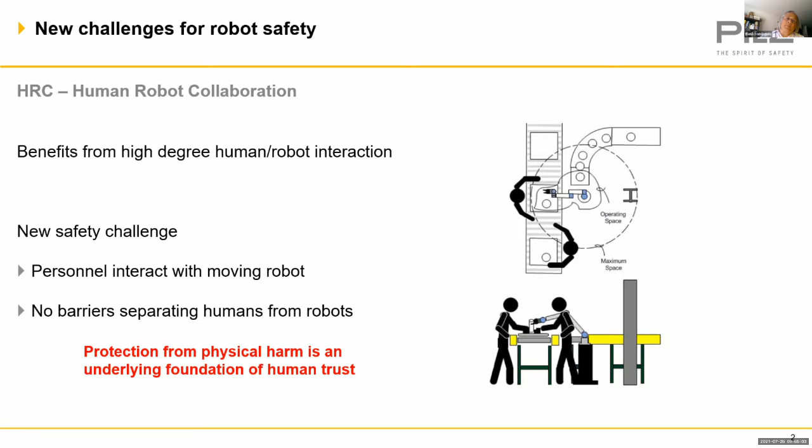However, that brings new challenges because now people are interacting with a moving robot and there are no barriers separating them. One thing I've been listening to here is talk about physical harm, the protection from physical harm, and I see that as an underlying foundation for human trust. If you think that robot's going to hurt you, you're not about to trust that robot. So this is the starting point, and the people here are taking it on to the next level.

Now, to safeguard a robot, you have to look at it in a more in-depth engineering view. In the past, you just had to put a fence around it, put in an interlock door, and stop all motion when you approach the robot. However, now we have a moving robot, so in this application we have to try to predict contact events. When and where might a robot strike someone? We have biomechanical limits that we want to respect to avoid injury.

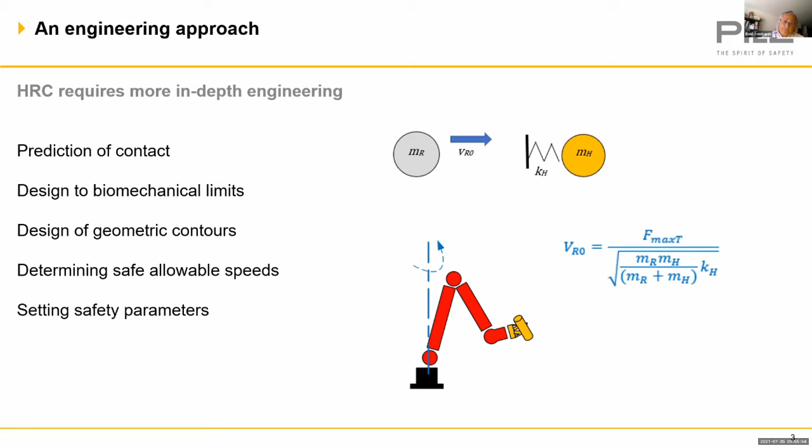We're looking at the designs of tools and fixtures and parts now, and the geometric contours they have to avoid injuries. We're looking at safe speeds and the calculations and predictions of that, and setting a multitude of new safety parameters. That comes about because of the collaborative robots that are now defined in the ISO 10218. Well, I shouldn't say now, it's been 10 years.

There are 4 methods currently identified: safety monitored stop, where someone approaches the robot and it comes to a stop, yet it's still powered up and ready to move at a moment's notice. Method 2, hand guiding, as you saw - you grab the robot tool or the part and apply force, or you hold the control and move the robot. But once you release the control, the robot will stop.

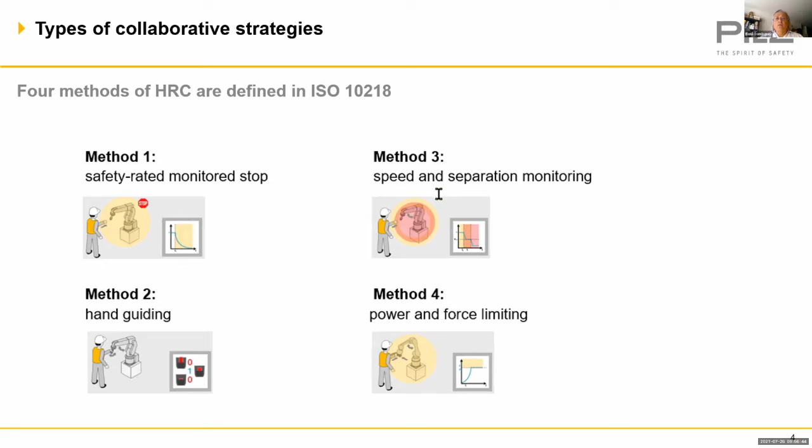Method 3, speed and separation monitoring, which is the hardest application, but there are some applications such as Veo Robotics that are looking at making this reachable in industry outside of the lab. And then method 4 - this is the application that industry in general is looking at, where they're focused on using these types of robots at this point.

They're smaller robots set up with small motors or control systems that will control the forces, the speeds, and the reach of the robot to keep the operation safe.

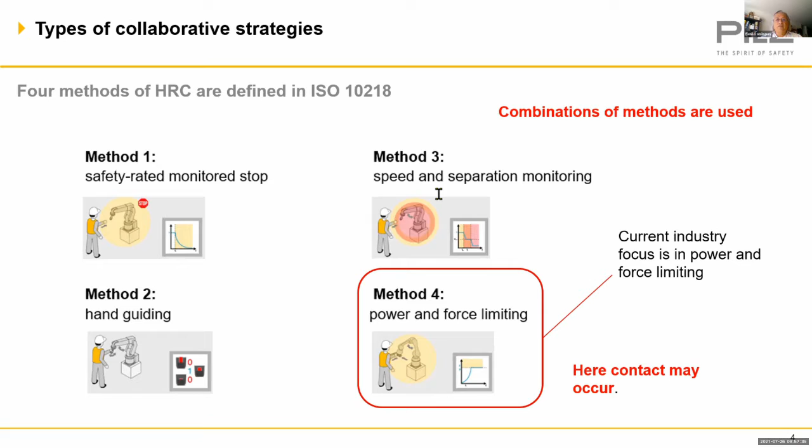The big difference here with method 4 is that contact may occur. Now you have people actually interfacing with the robot while it's moving, whereas in the other 3 methods the robot had stopped. In addition, typically there'll be a combination of these methods, whether you control the speed and slow it down, adjust the force, or bring the robot to a stop.

Now, in doing this, the essential thing that's mandatory in the robot safety standards of today is that you perform the risk assessment. This is the ISO 12100 model, where you look at risk as a function of the potential severity of harm, and the probability of occurrence of that harm.

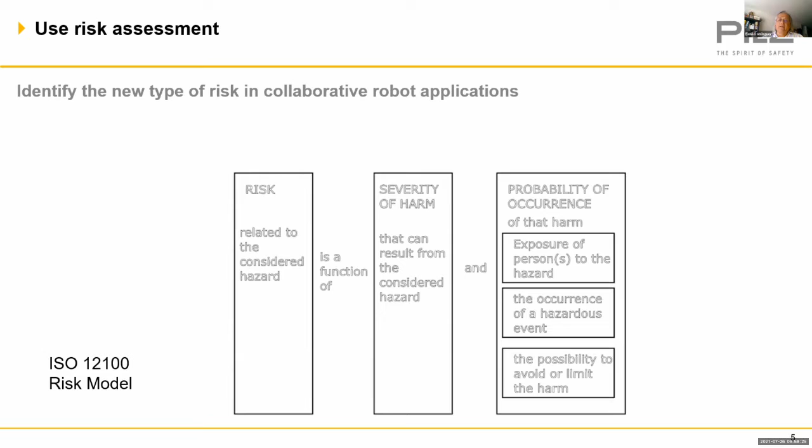Since probability of occurrence is hard to predict on paper without any history, we look at 3 factors: the exposure of the person to the hazard, the occurrence of a hazardous event - something fails, somebody does something they shouldn't do - and thirdly, the possibility of avoiding that harm. So you take that concept and apply it to the risk assessment of a collaborative system.

One of the essential new things here is that we have to realize there will be contact events - crush events and impact events. Situations where the robot presses the operator against a fixed object, and situations where the robot passing through a path in free space will contact that person at a given speed and momentum. So these contacts will occur.

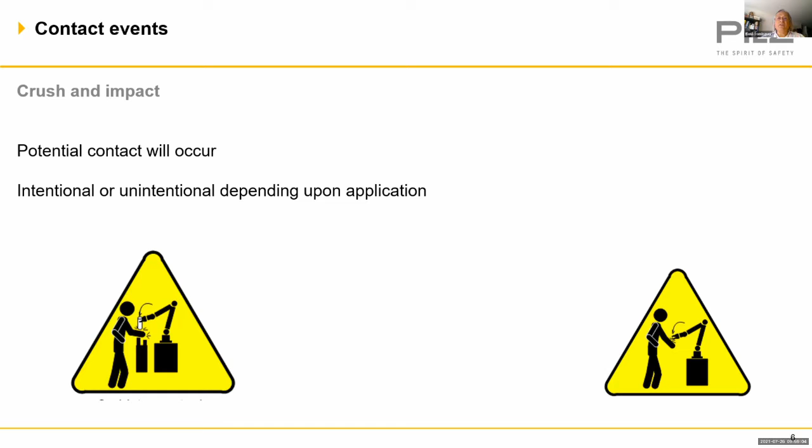Human nature is people will get in the way, either intentionally or unintentionally, depending on the application. So that just complicates the requirements for safeguarding the robot.

Now, the good thing is we have some data to work with. As an engineer, I love data, I love information, I love guidelines. So what we have in the ISO TS 15066 document is...

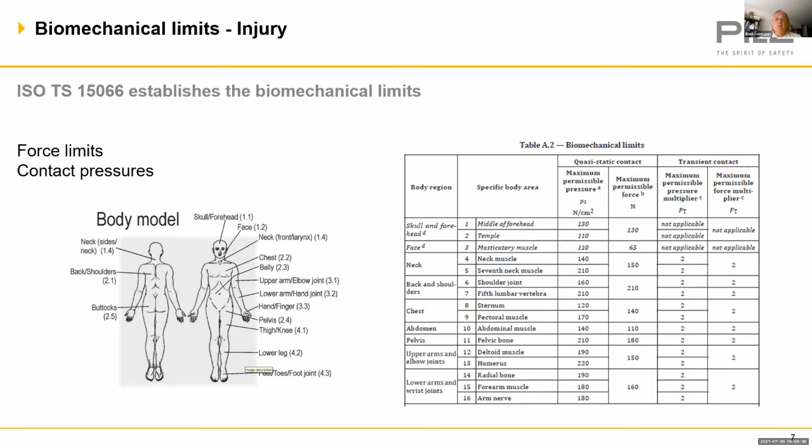...it establishes some initial biomechanical limits, that is, limits related to the human body and what it can take, that define force limits and contact pressure limits along different body regions. So with that, we have a chart.

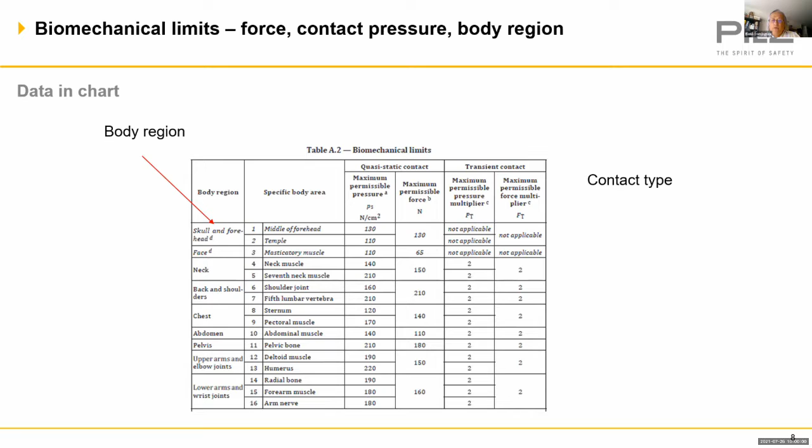This is only half the chart, by the way, so it's missing a few pieces of body regions that are common. But the first thing you notice is it says, if it strikes me in the chest, if it strikes me in the head, these are the associated limits. It breaks up this table by the contact type. As I said, there were 2 types.

First of all, there's the crushing, in which case it's labeled as quasi-static here, meaning that if the robot presses against a person for a sustained period of over half a second, then these initial limits apply.

If the contact is quick - say the robot strikes you in free space and you fall away, or if the robot presses you against a fixed object but then retracts right away, so you have an impact of half a second or less - then that is referred to as the transient biomechanical limit. In which case, for each of these categories, you have two parameters that we look at.

One is permissible force. Permissible force is based on injury data from medical literature - how hard can the robot push against someone without exceeding the minor injury threshold, to the point where simple first aid, whether it's a simple Band-Aid or just some time, will allow the person to recover without any lost time. In addition, there's contact pressure.

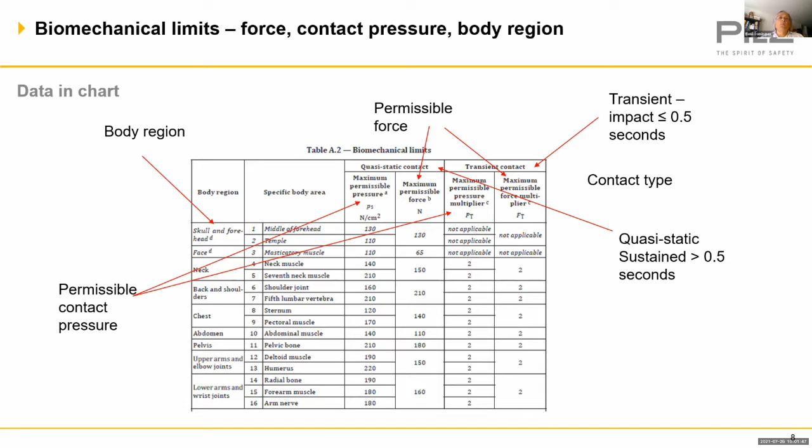Besides the force being applied, how big an area is that force applied on the human body? So we know if we take a dull surface and push it against the human body within the forces allowed in the previous columns, you're fine. But if you sharpen that edge and push it against a person within the allowable forces, now you start to cut the person. So contact pressure must go hand in hand with forces as we design a system.

So these limits, specifically quasi-static force and pressure limits, are sustained for over half a second. And the transients are for forces and pressures sustained for less than half a second. The forces are based on a minor injury threshold, while the contact pressure instead is based on a threshold of pain. The reason being that with contact pressure, you're going to feel pain first - it is the leading indicator as to where you are in the level of contact pressure.

So this table is established as a design guide for how to design the tool, so that if you can stay at or below the threshold of pain, you will definitely be below the minor injury threshold.

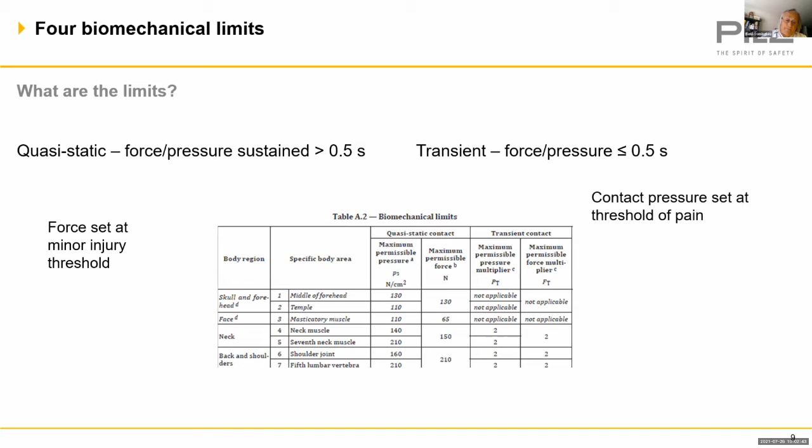So now we have data to design our systems. However, in our risk assessment, we have to define the potential contact events, regardless of what application you have with a robot. Now with the interactions of a collaborative robot, there's going to be contact. So where is it going to be?

In this case, I identified 3 different situations where I see potential contact. In an application like this, we have a robot that's picking up parts and building a pallet. In a typical job, I'll find anywhere from 5 to 20 types of potential contact points. Here I just show 3. At each one, you have to decide, is it going to be a crush or an impact? Because remember, the duration of that force or contact pressure is going to require the selection of a different biomechanical limit.

Therefore, you have to identify what type of contact it is. You also have to define the body region, because the body will vary in terms of vulnerability. Someone's hands will typically take more force than, say, my forehead, because I'm used to dealing with my hands and receiving a hit here and there as I do my work, but I'm not used to banging my head against the wall.

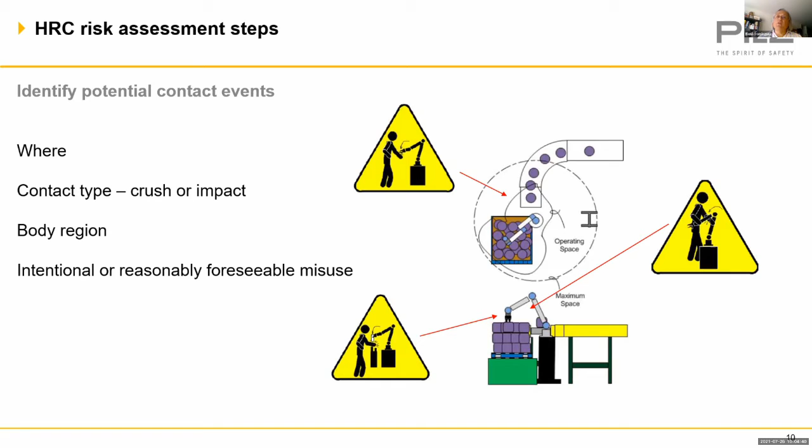But in addition, you have intentional, or as I say here, reasonably foreseeable misuse. In this risk assessment, you're going to need to ask the question, what is the human doing? If I tell them not to go in a certain area because of an increase of contact, will they do it? Most of the time, maybe 9 out of 10 times, but every now and then somebody may do something because you've identified a motivation for them to break the rules. So that goes into the assessment.

Now, the goal of the assessment is for this collaborative application to be safe. So we identify the protective measures to lower the risk, the initial risk of the cell, down to something acceptable. And running at an acceptable level of risk should give us a good safety record.

The typical thing that's done in industry now is they'll use a proven risk methodology to guide the user as to what protective measures are necessary and how many. At the end of the day, once you have experience running a cell, a good safety record is going to confirm that you've reached that level of safety.

In this case, I just show a graph out of the ANSI RIA TR R15.306 robot risk assessment methodology, where it shows a graph where you estimate the risk, and it shows some guidance in terms of what protective measures should be applied based on the initial level of risk.

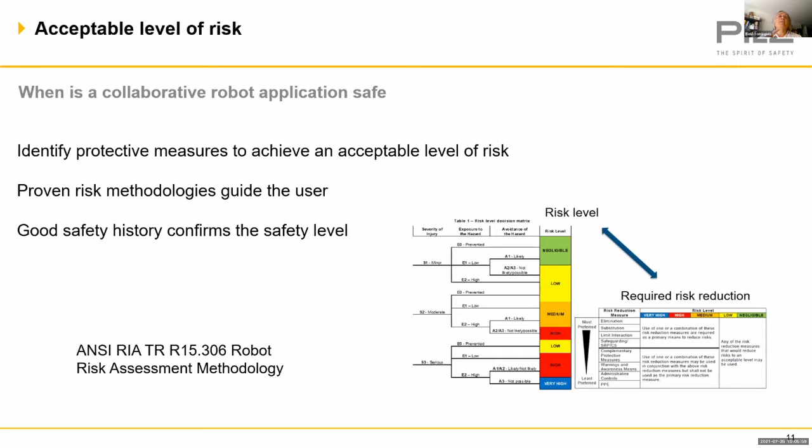So how do you safeguard it? You apply a risk assessment methodology that you know works, and you keep applying protective measures until you reach that acceptable level of risk.

So say you have an application, you identified a contact, a potential contact point, and you feel it's going to be over. So there's these risk reduction measures that have to be applied. There's active measures that are currently available with the technology we have, and we have passive measures.

So first of all, on active measures: if I have a robot that has a safety rated control system that can adjust forces or speeds or the space, which is essentially the reach of the robot and the movement of the arm, I can adjust those parameters and reduce those forces or speeds to get down below the biomechanical limits that we've identified.

There's also defensive programming. Maybe I can move the robot such that I can move the hand of the robot to a position where there's less exposure to certain surfaces or certain speeds or crushing points in the cell.

I can apply safety devices. A typical thing is to put a laser scanner, that's a presence sensing device that would detect people approaching the robot. And as they approach the robot, we could implement some lower speed limits to slow the robot down to what is an allowable speed, up to the point where we could actually stop the robot.

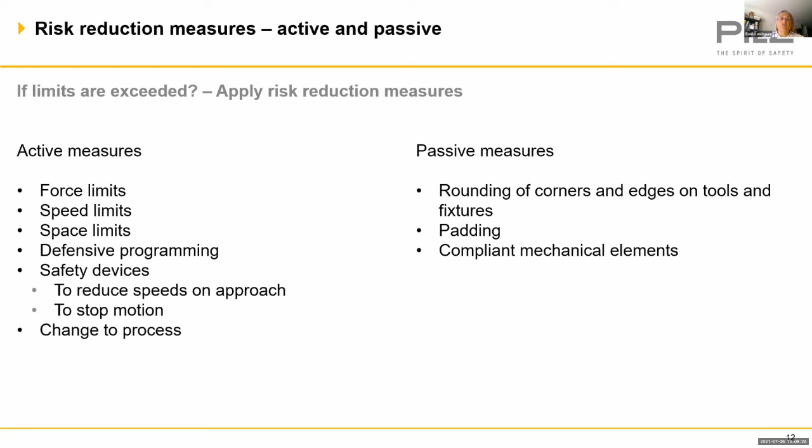Speed limits. So how fast should I allow a robot to move as someone is around it? There are some approaches now with formulas and calculations that you can take to predict how fast a robot should go. There's two situations. One is contact in free space, where you can look at the two masses, the mass of the robot and the mass of the human body region that's being contacted, and the stiffness of the human body in that area, and calculate an allowable speed. There's even a chart in the ISO TS 15066 to use based on how big the robot is and where it strikes the human.

In addition, you also have the same situation on crushing events, except that the human becomes part of the fixed object. So it's the robot and the human body stiffness that are relevant in the calculation. But from this, you can say how fast should the robot go.

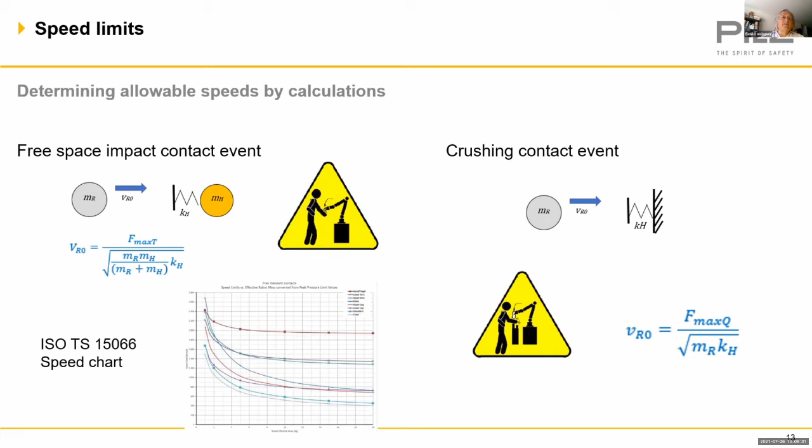This is an added step beyond what was traditionally necessary. Contact surfaces, as I said before, we used to not care because the robot would be stopped. Now the robot's moving. So do I have a sharp corner that can cause a cut, a deep cut on my arm? Well, let's round it out. Let's put some padding on it if we can't round it out. But this is new in terms of designing robotic systems that wasn't necessary before.

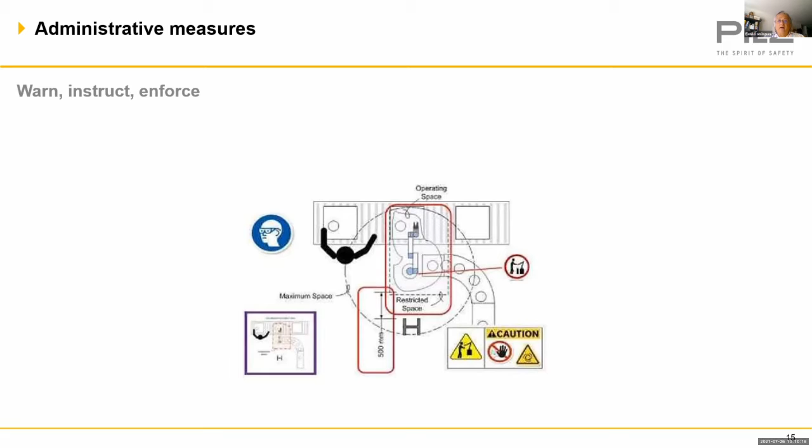Finally, we have administrative measures. We have to warn people with signage and warning signals. We have to instruct the people, train them on how to safely work near the robot, and enforce their behavior so that we minimize incorrect interaction with the robot.

Finally, the last thing is validation. Any safety system you put in has to be confirmed in terms of its effectiveness to provide its protective properties. So you're going to confirm the effectiveness of the protective measures.

And in collaborative robots, you have to look at forces. So you're going to take a special force measurement device and measure forces. This measurement device would simulate how the body reacts and what forces the body would feel. In addition, you apply a technology to measure contact pressures to see, are there surfaces and edges and corners that have to be rounded out or padded because they exceed the pressure limit? So you would also make measurements on that.

At the end of the day, any safety system needs to be validated before it's turned over to the normal operations and the personnel running the system.

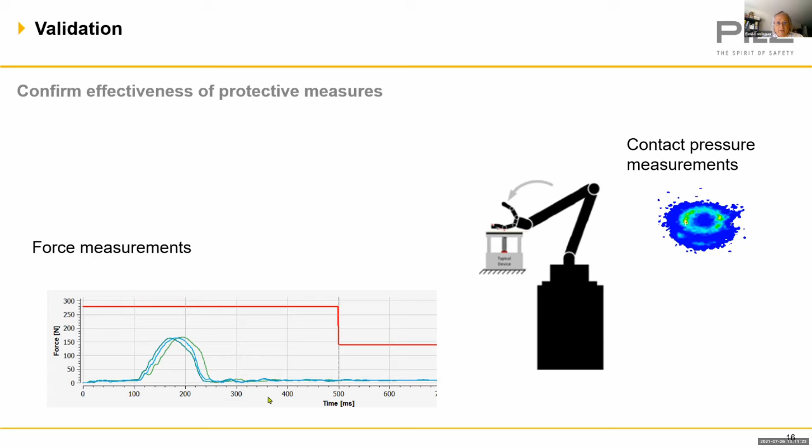So in summary, collaborative applications require engineering to engineer safety into the design. The typical collaborative robot is not guaranteed safe out of the box. You have to perform your risk assessment, analyze the system, design in the safety necessary, and then at the end, validate that the safety has been correctly reached in the application.

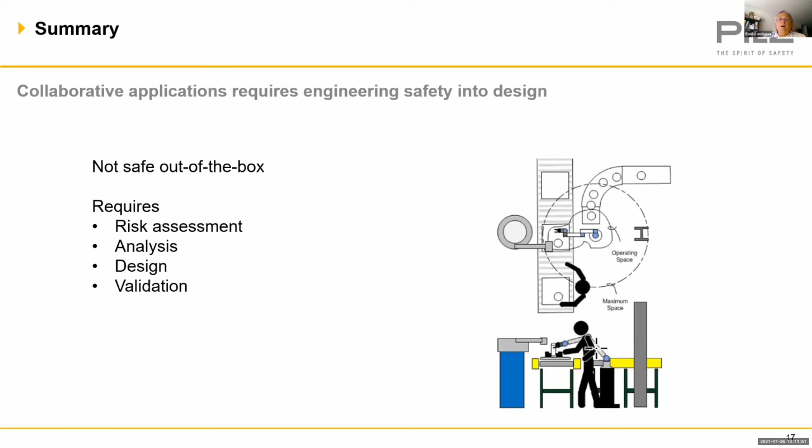So one thing I want to add here is that this is still in its infancy as far as understanding physical harm effects. There's going to be other things we have to look at, repeated exposure to pain. If I'm constantly feeling pain, even though I'm not injured, at some point that's going to have an effect. And I think more of a psychological one perhaps, but that has to be looked at and addressed in the future as we start collaborating closer with robots.

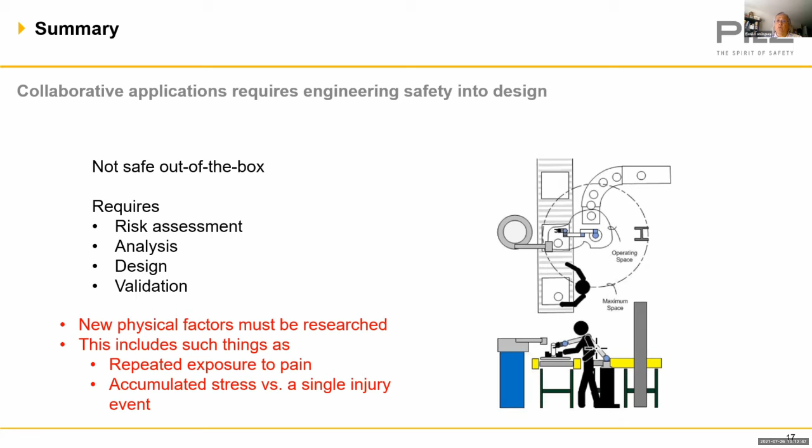And then we have to look at accumulated stress versus single injury events. Right now, we're focused on the single injury because that's been the nature of machinery with respects to humans. But now we are going to have a robot that's constantly there. And do we have accumulative effects that we have to worry about? So there's still areas, I believe, that will have to grow in terms of reaching a safe state.

So there we go. Please, if you have any questions, let me know.

Thank you, Elena. Fabulous presentation as always. I'm really glad you presented all of that because, as you pointed out at the beginning, physical safety is fundamental. I can talk about psychological safety, but it's nothing without the physical, and what we do builds on those parameters and engineering approaches that you begin with. That's fundamental, and it aligns with what Kevin said about human accurate perceptions of safety being fundamental to acceptance. So really important what you do, and I appreciate that.